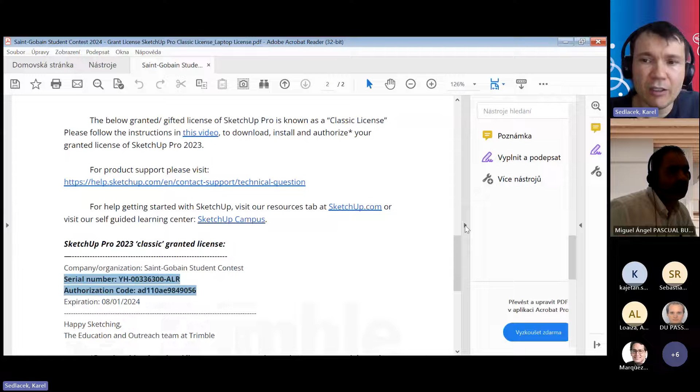Here is the guideline, but the best way is to see the video how to do it. I will share the video with you because I already used it before for myself, since I had a similar position like you have, so I installed it the first time.

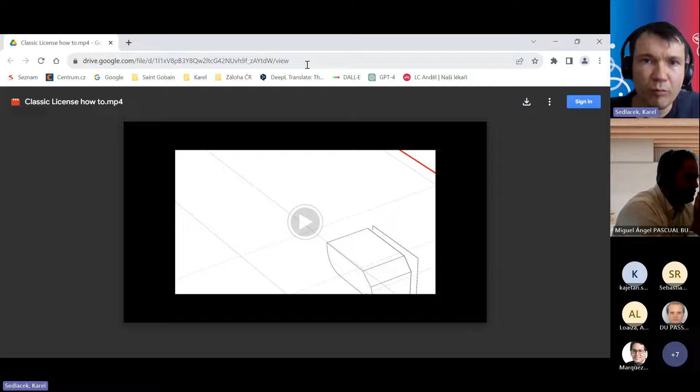So here is the video. I will also copy and paste the link to the chat so you can click on it and run the video afterward. Let's start with the video, and I will comment on it since you can't hear it.

Here is the video about the SketchUp license and how to use it. First, in Google you can type this link where you can download the SketchUp license. Use whatever browser you like, and sign in to Trimble ID. You need to create an email first, and if you already have one, just put it there, then the password.

I recommend first creating an account on SketchUp, and after that you can download the license. The code put there is for validating that your email is correct. So you put your email, the code gets sent to it, you validate it, and then you can download and install.

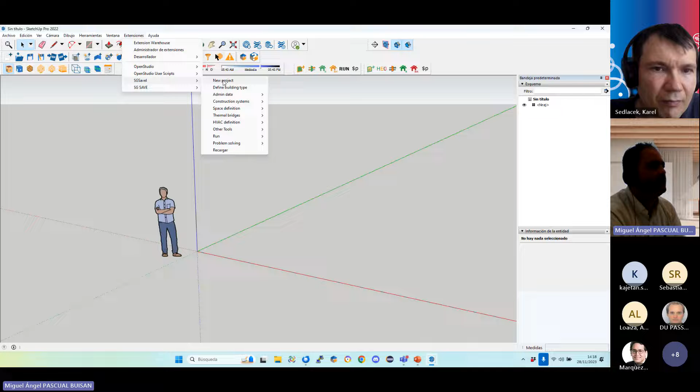Now a very important thing when starting a new project is that we should run this command. We should always start with new project. This is important because this command is preparing the folder structure that is going to hold our project. So, for example, I'm going to call the project 'day one'.

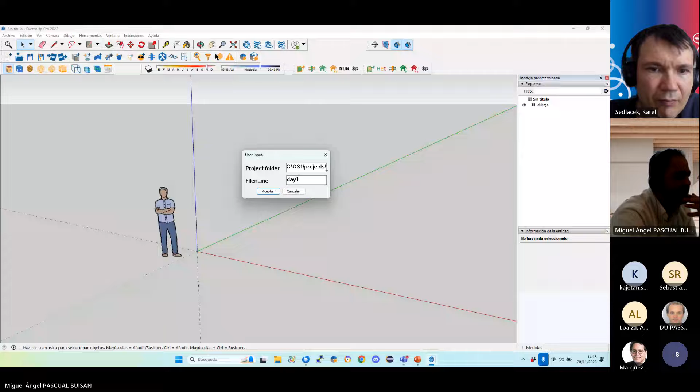And okay, we have a new project created.

Now we have to select the weather data for our simulation. Let's suppose we choose, for example, a climate weather for Paris. Please choose Helsinki because the students will do it in Helsinki. But you can also find other climatic data on the Energy Plus website. So if you write Energy Plus, you can also find the different climatic data.

But don't worry, for the student contest we will always cover this with the database of the cities where the student contest takes place. If you want to run a simulation anywhere else, you can ask us and we will teach you how to download another weather data and how to install it so you can use it with the tool.

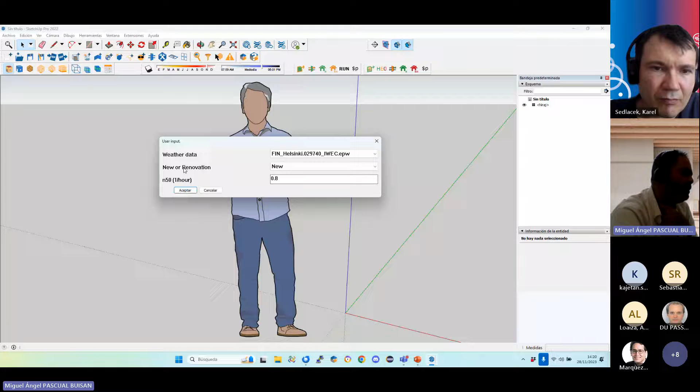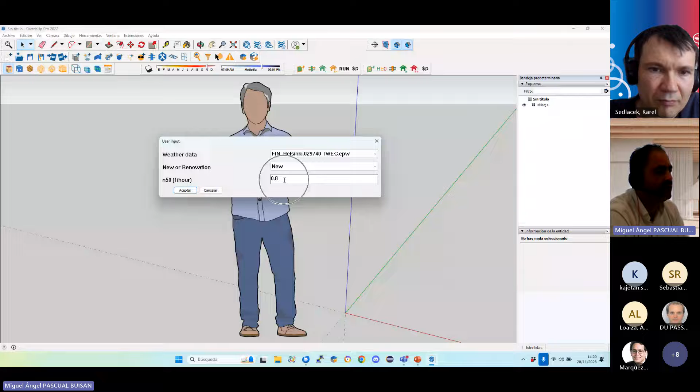Okay, we have here to choose: are we working on a new project or is it a renovation project? Because I guess the standards are a bit different. And the other parameter we have to decide is related to the air tightness of the building. If you don't know what to introduce, I would recommend you just leave the default initial value. Okay, we click accept, and then we can start modeling our building.

I will just mention then for the standard passive house, it should be 0.6 — there is a predefined 0.8, but if you would like to be according to the student contest, you should put there 0.6. But yeah, it's just basic information, thank you.

So introduce 0.6. Now we are starting with a very simple geometry. It's almost a cube that is 8 meters by 6 meters and 2.7 height. It has a couple of windows that are facing south. So this is just to start modeling.

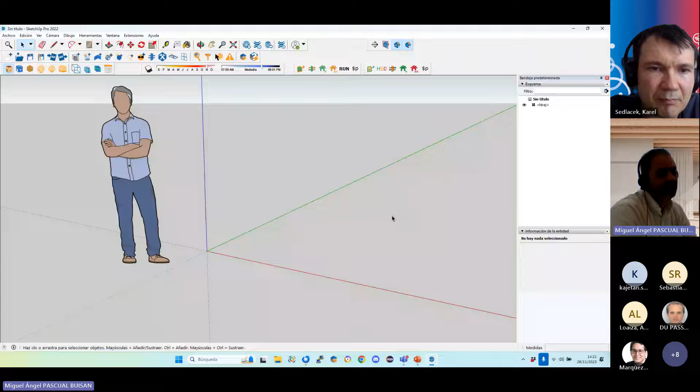When we start, we try to start with something very, very simple. Anyway, modeling with SketchUp is something that is fun. You start with simple things and then you can go into much more complex geometries with many spaces and so on.

So before starting drawing geometry, we have to create what we call in energy simulation a space. A space is the minimum mathematical entity in which we are going to have the energy balances — what are the gains, what are the losses. They are computed for each space we have in our geometry.

So we are going to create one space. For that, we will choose this button here. We click here, and I'm going to insert this new space. This is something like a fictitious entity — we can insert it wherever we want. So for my convenience, I'm going to introduce it at the axis origin. I introduce it — okay, this is a space.

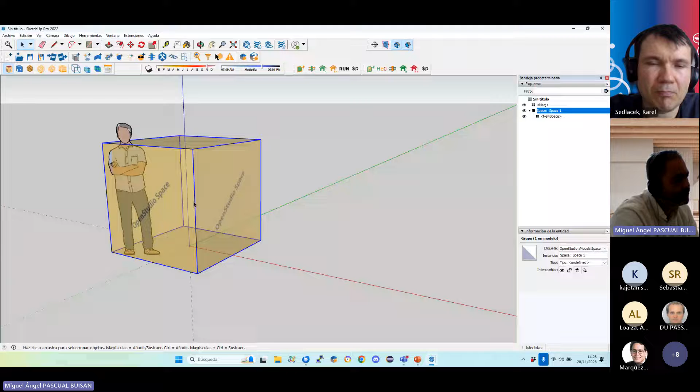Okay, this is a selected space. I notice it because the corners and edges are blue. That means it's selected, but I need it to be open in order to host the geometry I'm going to draw. So I'm going to double click on it, and now it's an open space. An open space is represented with a cube drawn with a dotted line.

So now I have to start drawing my geometry when the space is open. In most cases, what I'm going to do is take this tool, the rectangle. Maybe when you run SketchUp for the first time, instead of this icon, you could have this one or this one or this one. If that's the case, just click here and choose rectangle. So when we are going to draw a rectangle, you see the cursor has a pencil shape and the shape of the rectangle.

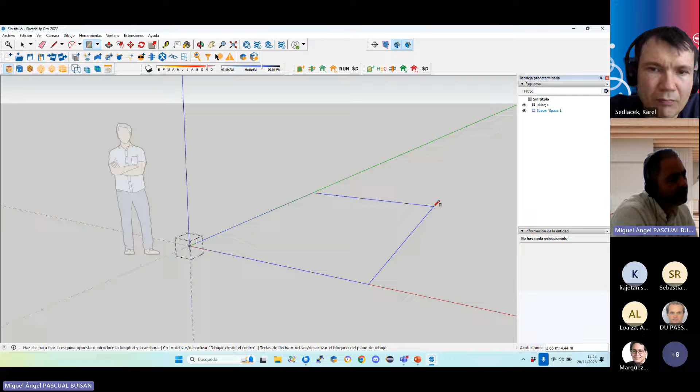In order to draw the rectangle that's going to represent the floor, I have to click two corners. The first one, I'm going to choose the origin of the axis. So I click here with the left button of my mouse. Now I move the cursor to another area of the screen, but instead of clicking, because if we click in any point, I won't know the dimensions of that square. It's as simple as writing 8 semicolon 6. If you notice in the bottom right corner, it's written 8 semicolon 6, and then I click enter. Now we have this floor whose measures are 8 by 6.

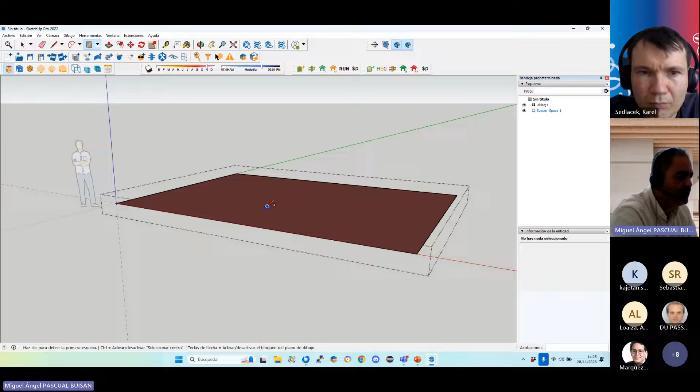You can zoom up and zoom down using the scroll wheel of your mouse. And if you click the wheel of your mouse, you can change the view that you are seeing.

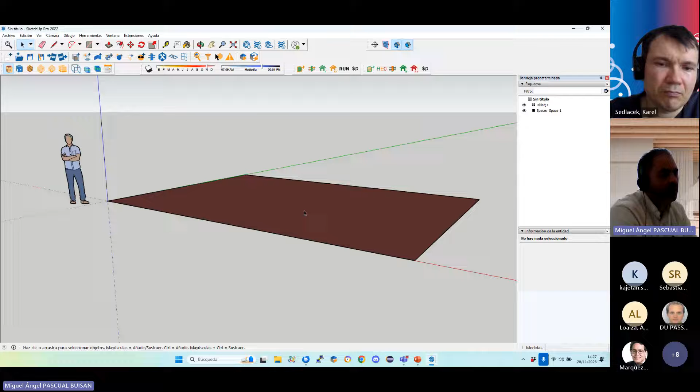It's important that you don't click outside of the screen now, because that will close the space that is open. In case you do, for example, I'm going to press the escape key, and the space bar - I click the space bar, I have switched to selection mode, and now if I click somewhere in the screen, you can see that I have closed the space. We cannot see anymore the surrounding box with dotted lines that we were seeing a few moments ago. So what can I do? If I want to continue inserting geometry to that space, I have to reopen it. How am I going to reopen it? With a double click. So I double click, and here it comes back, the space. I notice it because of the surrounding dotted line box that I can see now.

So usually we will start drawing the rectangles of the floor. Now how can I generate the rest of the geometry? In most cases, we are going to use this tool - in English, it's push and pull. And we are going to use it pushing. For example, I click here.

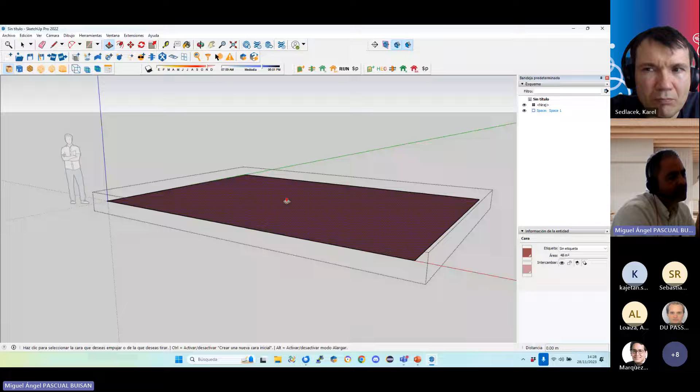You see, when I left the cursor near the floor rectangle, it becomes shaded with dots. That means that if I click now, I'm going to pick that surface, and it's going to be the surface that generates the push. So I click now, and I move the cursor upward. As you can see, while we are pushing up, new geometry, new rectangles, new faces appear. Now it's more or less the same as before - if I click anywhere on the screen, I won't know the dimensions of that geometry, I won't know the height.

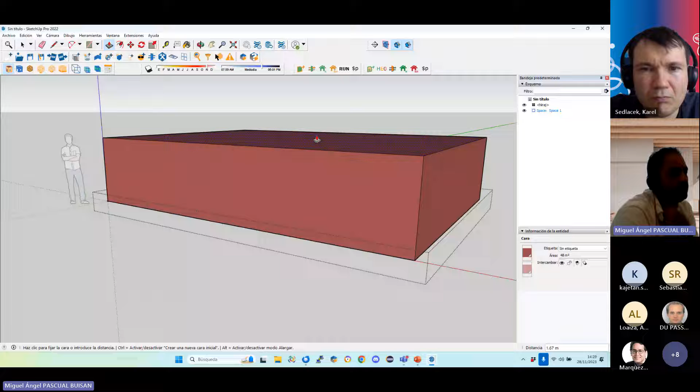So if I want it to be a certain dimension, I have to enter it again as before. For example, in this case, 2.7, and then I click enter. So now we still have the space open - we can see it from the surrounding box. I can press the space bar to switch from the push and pull tool to the selection tool, and then when I click outside the space, the space closes.

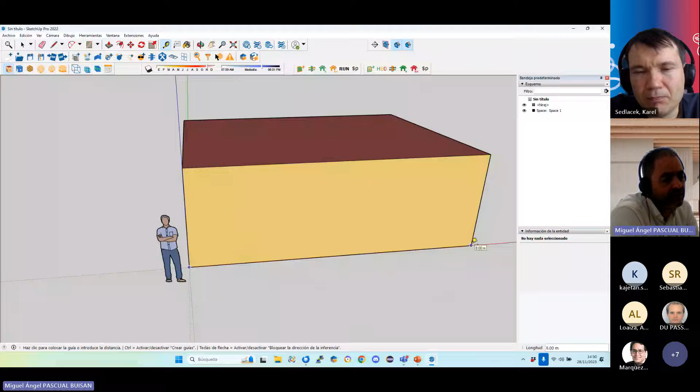So here is our cell, here is our space. I can check its dimensions. In order to check the dimensions, I'm going to take the tape tool. I take it, and for checking the measures, I click in the origin of the measure, and then I move to the other corners. I don't click in the second corner, I just stop the mouse there, and the attractor takes the closest important point in the area. So we can see here in the tip that that's 8 meters, we can see there that it's 6 meters, and we can see that the height is 2.7 meters.

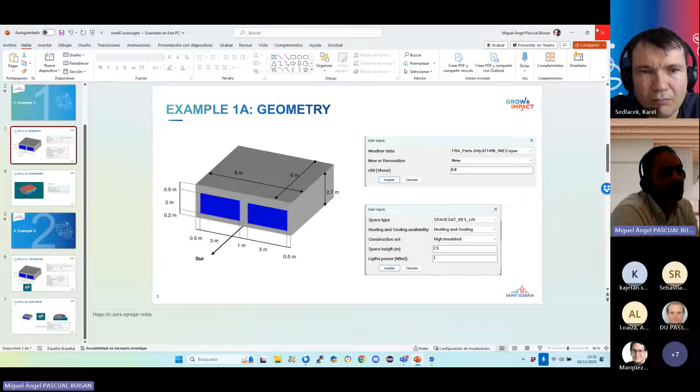So the geometry is okay, it's what we want. Now we need to insert some windows. As you remember, in our example we have two windows that are 3 by 2 meters, and they are at a certain position. So how do I draw the windows? It's as simple as drawing a rectangle on that wall.

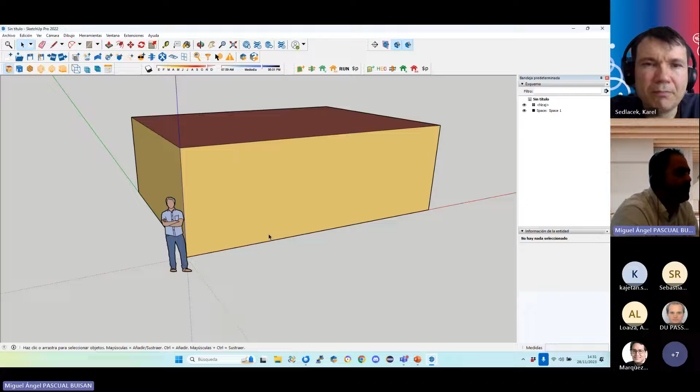If that window is going to be part of this space, I have to open the space first. This is very important, something we often forget about at the beginning. So, I am in select mode, and I have to double click on the already existing geometry of that space.

Now that it's open, I can take the rectangle shape again and draw, for example, a couple of windows, or as many windows as we want. But those are not the windows in our example. These are windows that I have generated randomly, so what I'm going to do is delete those windows.

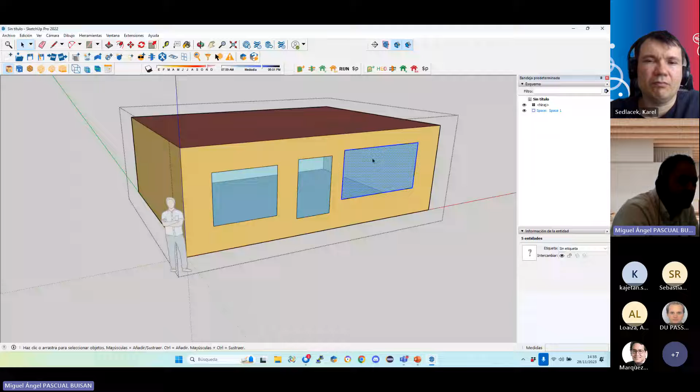How do I do it? The first thing to do is to change to select mode, either by clicking here or by pressing the spacebar. I'm going to double click, 1, 2, 3. Really, I've lost count, but I stop clicking when I notice I have selected the rectangle, the perimeter, and the border. Now I just click the delete key on my keyboard.

This is the same: I finish with a double click, selecting everything around - the face, the rectangle, and the border. It's also possible to delete one window just by deleting one of the edges, because when you delete an edge, the window is no longer closed and disappears. I can draw another line and the window will reappear.

In most cases, this is just an approach. Sometimes the real dimensions of the window aren't very important, though this isn't absolutely true, because solar heat gains through a window and shadowing or self-shadowing depend on its geometry. But for a first approach, in many cases you don't need the exact dimensions. You can make an approach with probably the same surface area, but instead of 3 windows, you have just 1 window with the total area of those 3 windows in that facade.

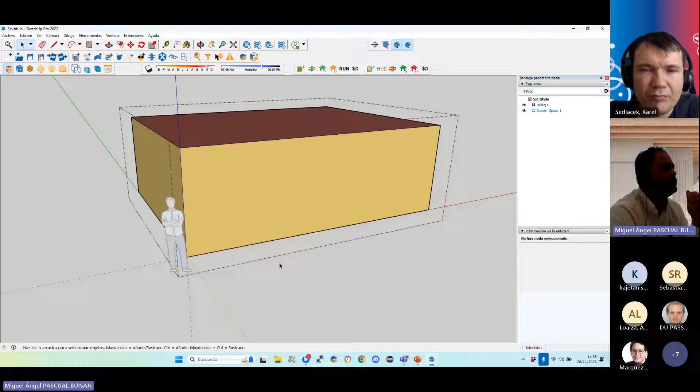Anyway, I'm going to try to explain how to locate these windows with some precision. To do that, we have to use the guidelines. If you have previous experience with SketchUp, you know these auxiliary lines are very useful if you want to draw with certain precision.

It's funny, but in SketchUp, in order to draw these auxiliary lines that help us introduce geometry with the right dimensions, we are going to use the same tool that we use to measure - the tape tool. How does it work? The first thing to do is click on an already existing edge, for example this one.

After clicking the base edge, if the auxiliary line doesn't appear, you have to click the control key. Now it's appearing, and it works more or less as always. I can click in the screen, but then I won't know the exact distance of that auxiliary line from the base edge. Or I can type 0.2 and press enter, giving an auxiliary line with an offset of 20 centimeters from the base edge. It's more or less the same from here.

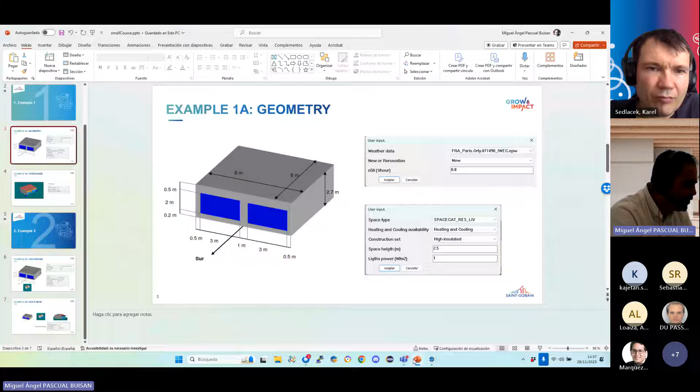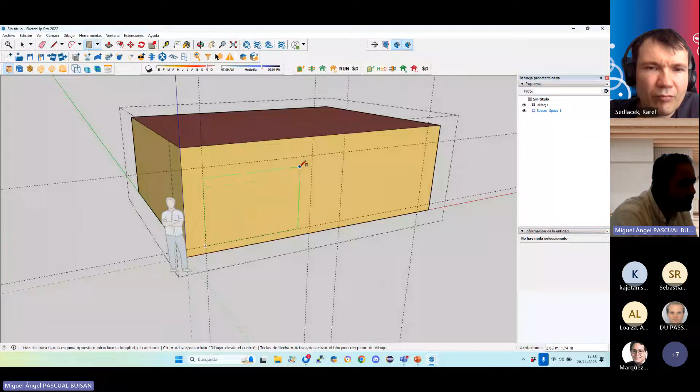You see, it's not appearing. If my memory serves me well, it's 5 meters - no, half a meter. We can write 0.5 to the right, and 0.5 from here, and for example 3 meters from here, 3 meters from here, and I think 2 meters from here or something like that. So I have drawn some auxiliary lines that can help me now draw the windows, just clicking from intersection to intersection.

Usually, once you have finished drawing your geometry, your model, the auxiliary lines, it's good to delete them. So here we have a tool. Sorry, because I have SketchUp in Spanish.

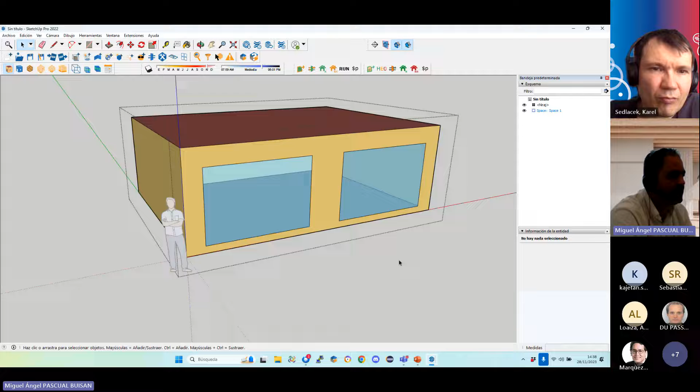But the tool we have to use to delete these auxiliary lines in English is called delete guides. Okay, I have the geometry. So what's next? In order to run a simulation, we have to define a few more things. We have to define what kind of a space is this space.

Because what kind of a space is important. Is it a residential space? Is it an office space? Is it a healthcare space? Because associated with the different space types, there are different loads.

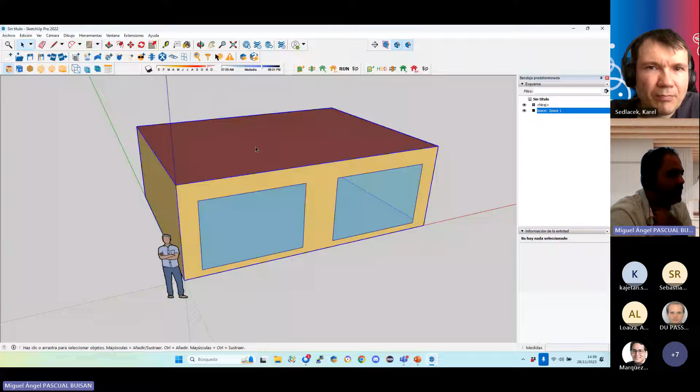Different heating and cooling loads, etc. So how can we do that? What we have to do in order to define the heating loads we have in the space is first select that space. In order to select the space, we have a couple of options. We can click on it. Be careful because it's just a simple click.

You see, we have this space. Now the edges and the corners are highlighted in a blue line. That means that the space is selected. It's important that you distinguish this from opening the space - this is selecting the space, not opening it. With just one click. We have another option, when you are in select mode, you can open a window that includes the space, with the same result - the space is selected.

So now, where is the tool to define the space? To define the space type we have here a couple of options. You can click with the right button of the mouse. You can come here to this menu, SGSavei, with an I at the end, and you can select - you have a couple of options.

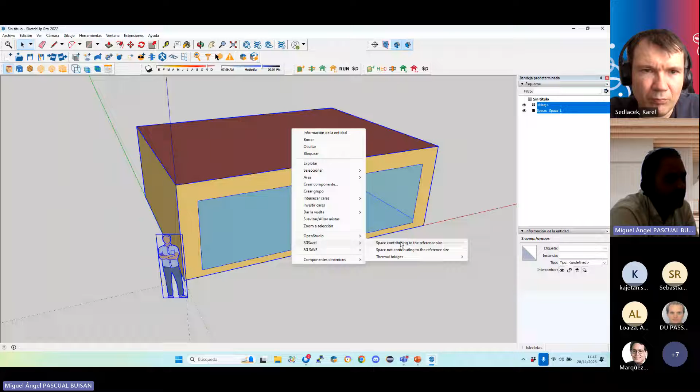Space contributing to the reference size - this applies, this is terminology of the ISO 52000 standard. There are two types of spaces: some spaces that are contributing to the reference size of the building - these are spaces that have a heating or cooling HVAC system - and spaces that don't contribute to the reference size, like garage or storage spaces, and so on.

So let's suppose this is a space that is contributing to the reference size, so I would choose the first option. And we just have to select a few things. What kind of a space is it? This is residential living, we are going to leave it like that. This is also the same categories that we have in the ISO 52000 standard.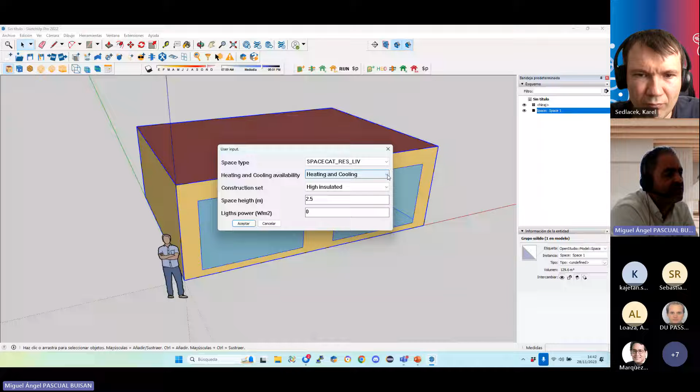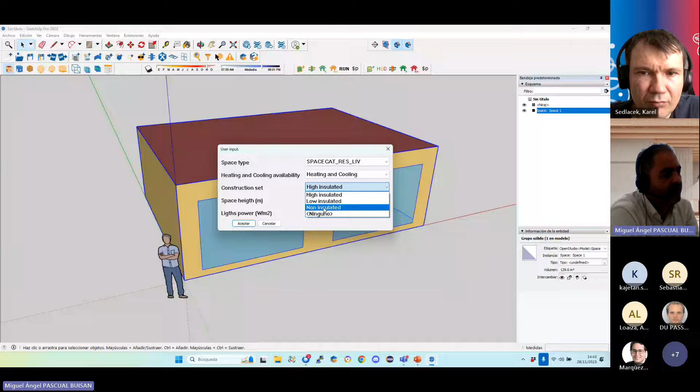The next thing we are going to choose is what kind of HVAC system do we have here. We have a heating and a cooling equipment, so we have to choose this option because this will introduce a heating and cooling thermostat. And then we have to select something about the thermal insulation of the envelope - this is something we will come to later. For the purpose of explaining, we are going to start by choosing that the construction, the envelope of this space, is not insulated.

Okay, the next question is about the height - this is the free height of the space. From here to here it was 2.7, but we have a false ceiling, and the real free height that we have in the space is just 2.5 meters. And let's suppose we have a very low lighting power here, about 0 watts per square meter. I'm going to click to Miguel, I will accept.

Just mention for the students that everything you can modify also afterward, so it's possible to change it also. If you would put something and you don't know at the beginning, put something there and after you can modify it later. So everything is possible. This is just a little note.

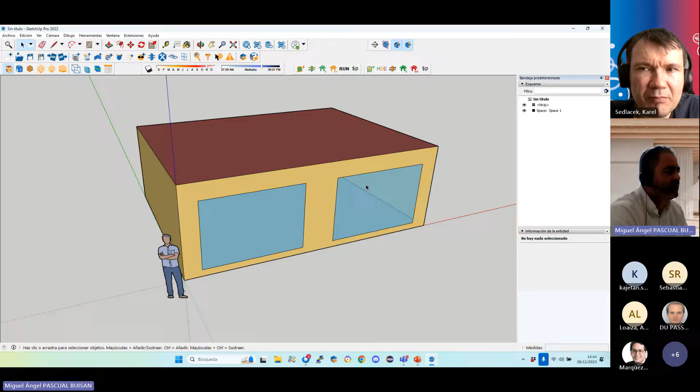Thank you, Miguel. Okay, so now I'm trying to keep things very, very simple. Maybe next day I will go into a bit more complex things. But what do we have to do now? Let's get started - we are going to click the run button here.

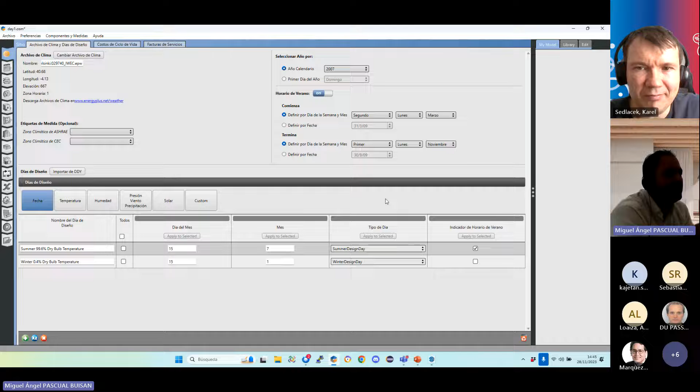Okay, one of the things is that SG SAVE International is a plugin running on a generic purpose software called OpenStudio. Our purpose is to try to make things as simple as possible. This is a very complex tool - you can configure many things here, very complex advanced systems. But as a starting point to the simulation world, we try to make things very simple. So in most cases, the only thing you will have to do is come to this label, this button, and run here in order to start the simulation.

Okay, this is a very simple model. So this is something that sometimes happens - the first time you run a simulation on a model. Okay, I rerun the simulation, and okay, this is complete. I will just mention the simulation.

Also one more thing - since Miguel is using a combination or mix of Spanish and English, but you will have everything in English. Don't worry.

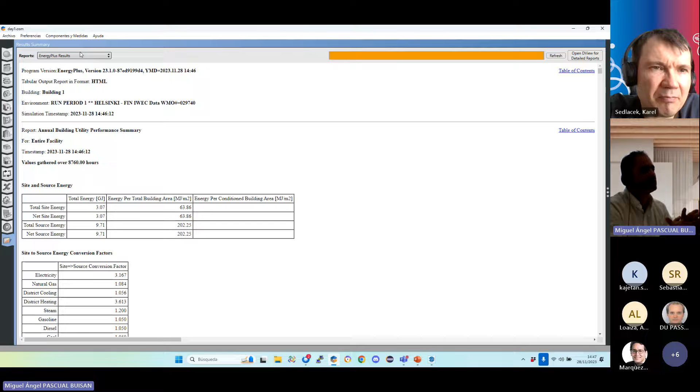Okay, so once you have finished the simulation, you can go here to the results summary. You can go to the next button here, and here you can find two reports. This is the Energy Plus results - an historic report from Energy Plus that we have been using for 20 years.

So it's a really complete report that you can use in order to analyze many things. It's usually important to check the partial results you have in that simulation to know if the surface area of the building, the volume of the building, the heating loads are correct - everything.

So it's really important to have a look at this report. Miguel, there is a question in the chat.

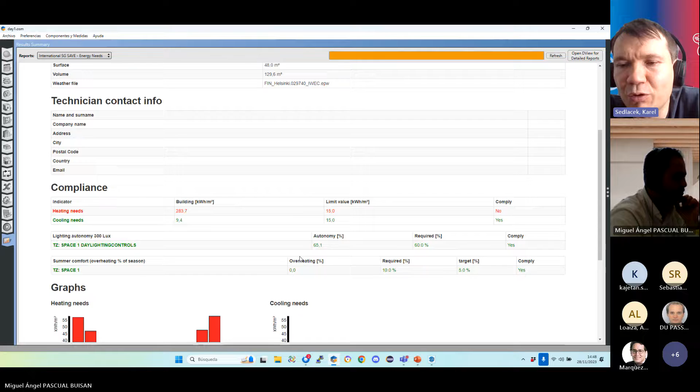Open Studio should be installed on the computer - will it be installed with Saint-Gobain SAVE International? Yes, it will be automatic install with Saint-Gobain SAVE International. So don't worry - after you install SketchUp first, and then Saint-Gobain SAVE, it will automatically also install Open Studio because it's part of Saint-Gobain SAVE International.

So don't worry. And also in this system, what Miguel is showing you, there's lots of things predefined for the standard building. So if you would like to change something, you can also do it after the first calculation, before you finish here. So the first calculation is somehow a black screen.

What you have seen, one black window - this is just how the calculation transferred the data to Open Studio. And after that, in Open Studio, you can change, I don't know, the occupancy of the people, some other details, HVAC system, and many other things if you would like.

But we made it as easy as possible for you. So lots of things are predefined according to the building and the basic standards. So if you used offices at the beginning or a residential building, lots of things we already predefined for you to make it easier. But if you would like to change it, you can do it here quite easily, or also in SketchUp if you would like. So it's up to you.

But if you don't really have a reason to change it, you can just check it, and if you agree, you can just continue. There is another question.

Will there be any conflict in case Open Studio was already installed on the computer before? I have it already installed. Okay, so it depends on what kind of version you have, but it can happen that you already have the latest version, and in Saint-Gobain SAVE it is still the older one. I don't know if there can be a conflict.

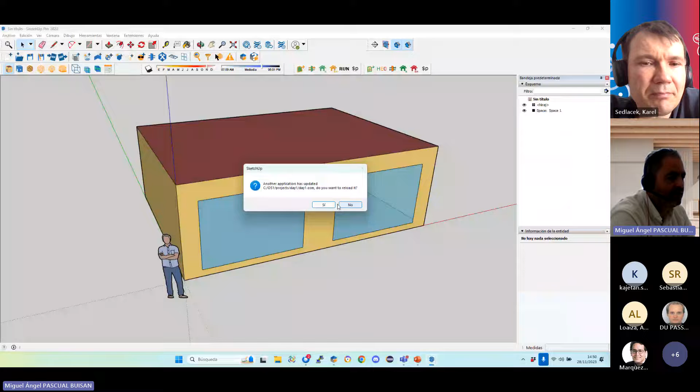Maybe Miguel has better knowledge. Yeah, really, when you install SG SAVE International, you are also installing OpenStudio. Okay, it's important that - there is a little thing you have to take into account if you have a previous install and if you are using the SketchUp plugin.

The only thing you have to take into account is that you have to go into preferences and you have to configure it to use the OpenStudio application - I think version 1.5 or version 1.6, because it's clear.

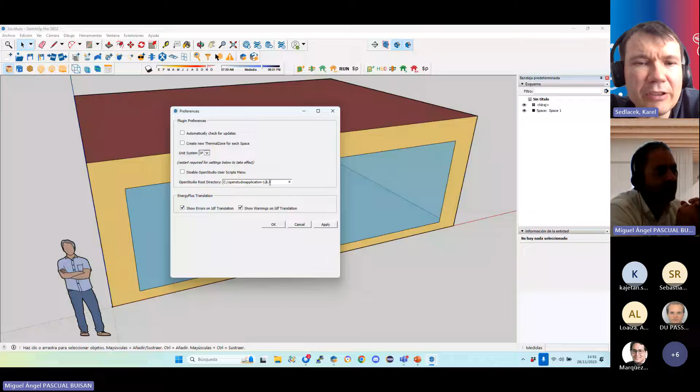Yeah, because I also experienced this in the past, in my case. So probably you will install both - you will have the current version of Open Studio and also the new one.

And what Miguel shows, you also need to go to the latest version in the menu of Saint-Gobain SAVE. Yeah, you already found it. Perfect. Thank you, Miguel. I have installed many versions, but in order to run SG SAVE International, you have to use the last OpenStudio application that is available now.

So we were checking the results - where are they? Where are they? I don't know what happened. Ah, here it is. Okay, and we have this other report.

Okay, here we are studying a few things - we are studying what are the heating needs, the cooling needs. This should be, both of them should be lower than 15 kilowatt-hours per square meter.

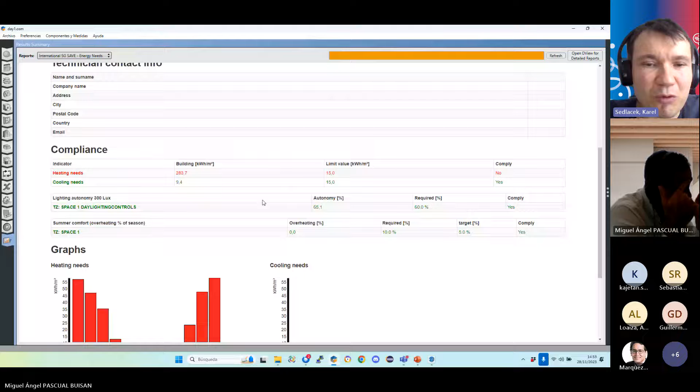As we have chosen a non-insulated building, it's clear that we are not complying with that. I'll explain for the students, because maybe it was not so obvious. At the beginning we chose a kit or set of construction without isolation to make it faster. So you probably didn't miss the option to choose the construction, because we already chose the predefined set. We have these results because we didn't choose any construction, we just used what was predefined here, like no isolation.

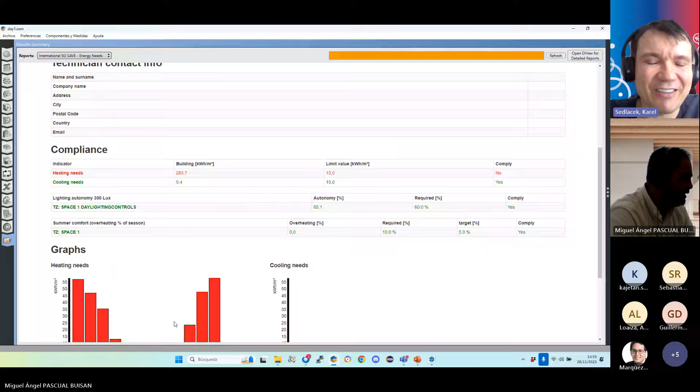This explains why you can see this kind of huge numbers according to heating needs. I'm going to explain. So, okay, we have a few graphs and a few tables.

It's also important that you can investigate, it can help you to understand your building. You have here a button to open what's called the detailed reports. When you click here, you can have access, for example, to... okay, this is confusing me.

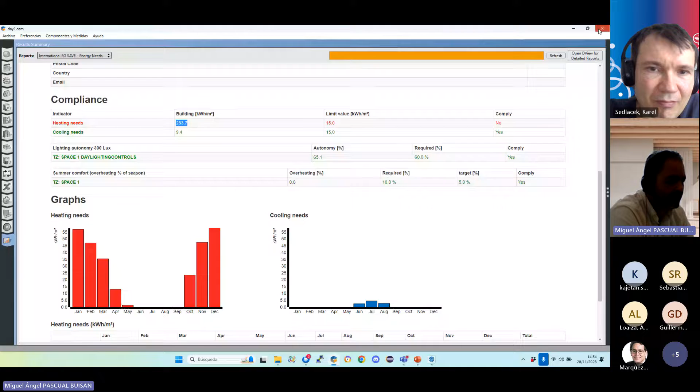Okay, yes, because we haven't installed an HVAC system for this graph. We will come back to this later. So, we are not complying, we have chosen a non-insulated envelope. How can I fix it? How can I change my model in order to improve this? Anyway, I have to say that for this cell it's going to be difficult to comply, because it has very little surface area and a lot of envelope for losses. So it's going to be a bit tricky.

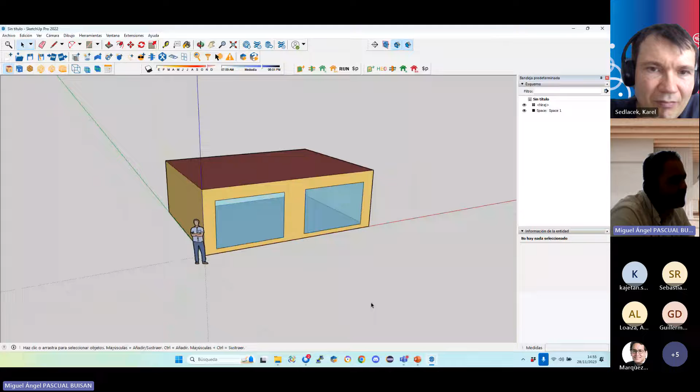When we define this space, we have chosen a construction set that is non-insulated. As Karel has mentioned, there are also other predefined options for the envelope, one of course is high insulated. I'll just add that students can also create the set they would like. So these are three options, just for a quick explanation, but if you would like to do your own set - and in most situations you should - you will create your set and after you will adapt it for the whole building.

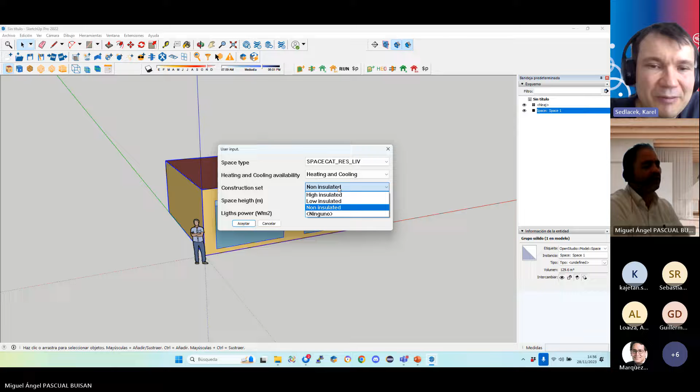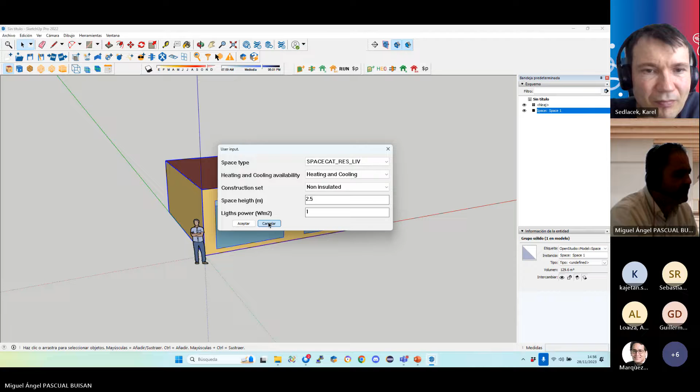These predefined preliminary options are all in order to run a simulation for a first case study, etc. So how can we define a new construction set? We have to go here to extensions, we have SG SAVE International, and we have to go to construction systems. Here we can define new material, new glasses, new construction system - the different layers that make up a wall.

You can define something with an internal heat source - this is for a radiant system, a radiant floor, and so on. But we can define a new construction set. We go here to define construction set, and for example, we find here what we have seen in the space definition. You remember we chose uninsulated, and there were two more options: low insulated and high insulated.

How does it work? This works if we choose uninsulated. Here we have everything - exterior surface construction, everything in contact with the outdoors, with the exterior environment, with the exterior air. We have walls, floors, and roofs. So for everything in contact with the exterior that is a wall, the construction system we have introduced is this one: non-insulated wall with double brick with a cavity in the middle. For the floors it will be this one, and for the roofs it will be this one.

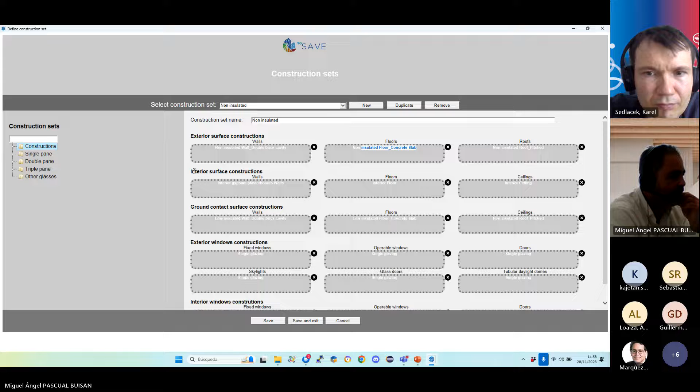These are the constructions that will be used for interior surfaces - interior surface is the surface in contact with another space. Here it will be more or less the same: walls, floors, and ceilings that are in contact with the ground. And for exterior windows, we have big single glazing windows.

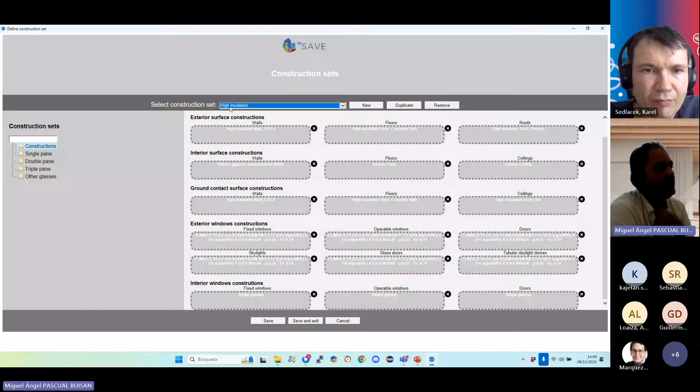So, for example, if I want to improve this, I should have checked high insulated. If I choose high insulated, I will have here a high insulated wall with ETICS technology - that means the typical exterior insulation system for a wall. A high insulation floor, a high insulated roof, and for the windows we have triple windows with thermal transmittance of 0.6 watts per square meter per Kelvin, with a solar heat gain factor of 0.55 and a visible transmittance of 0.74.

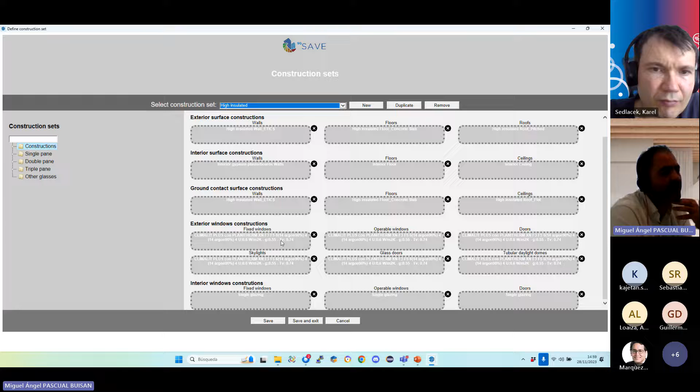How can we change this? Our recommendation is usually to start with one of these predefined construction sets. For example, I'm going to duplicate this high insulated construction set. Now it's copy - instead of copy, I'm going to say my construction set.

My construction set, okay, maybe I'm happy with these windows, or I can choose from this tree. From this tree I can choose other glasses or other ceilings that are predefined. For example, maybe I'm not happy with this high insulated wall, and I'm going to choose this wall plus ventilated facade number 3. I just click, drag and drop in the box, and I will have changed this wall.

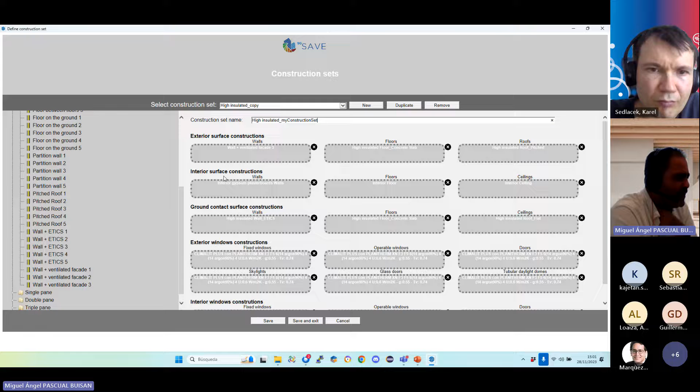Okay, but how can I define a construction so that it appears here, and so I can use it to define a wall for my construction set? I'm going to save and exit here, and instead of going to the construction set, I'm going to define construction system.

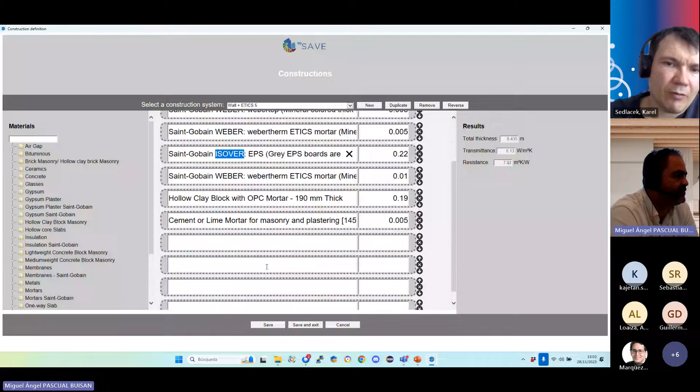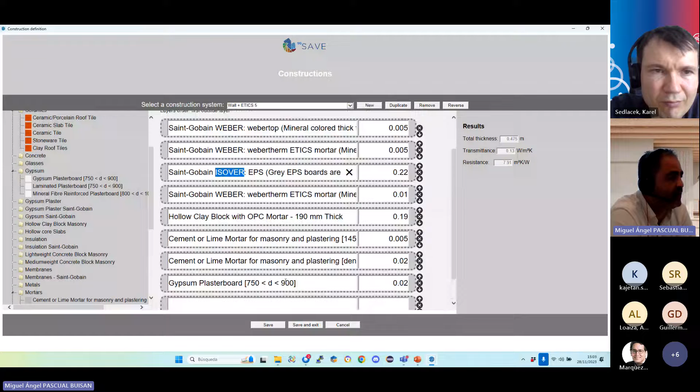But how can I add a new layer? It's as simple as this. I don't want to modify it, so if I want to add, for example, a mortar layer in the bottom - really, sorry if this is not correct from a construction perspective - if I need to add a new layer, I just have to find the material for that new layer, and just like before, click, drag and drop it into the empty box. That's all it takes to modify an existing construction set.

You can modify the thickness of that layer. As you notice, while I modify the thickness, the resistance and total thickness of the wall will change. You can move a layer upward or downward, and you can delete a layer by clicking there.

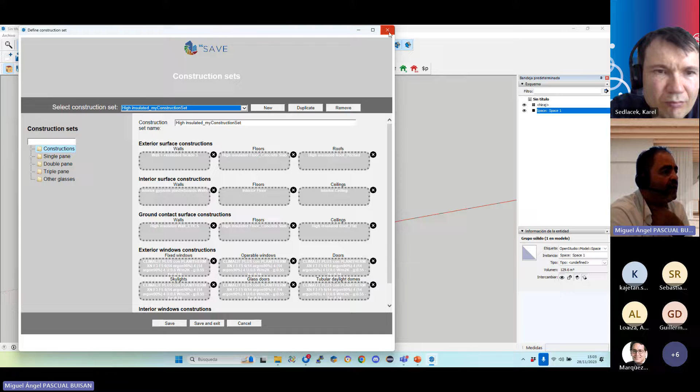So, as you remember, I'm going to go back to construction sets. The thin construction set - this is high insulated my construction set. This is the construction that I copied before, and I have changed this wall. So how do I assign this new construction set to this space?

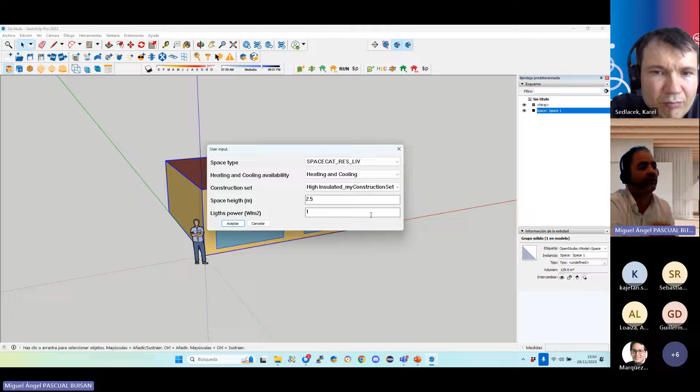It's just to run again the definition command. We click here to space contributing to the reference size, and instead of choosing the construction set 'not insulated', we are going to choose our new construction set. I'm going to click in Aceptar, and now we have to run again.

I will just mention again that the first calculation in the back window is quite fast, but sometimes you need to wait for it to finish, and after that you can launch the second calculation. The first one is just for transferring the data from SketchUp to OpenStudio, and the second one is the final calculation.

As you can see now, this is a very special case. It's really hard to comply. But now instead of having 200 kilowatt-hours per square meter of heating needs, we are close - we are at 25. But this is going to be tricky to comply with, because in energy efficiency there is a concept called compactness. Compactness is the relation between the volume you have in the enclosure and the envelope of that enclosure. So if you have a very small space, like in this example, it's really difficult to comply.

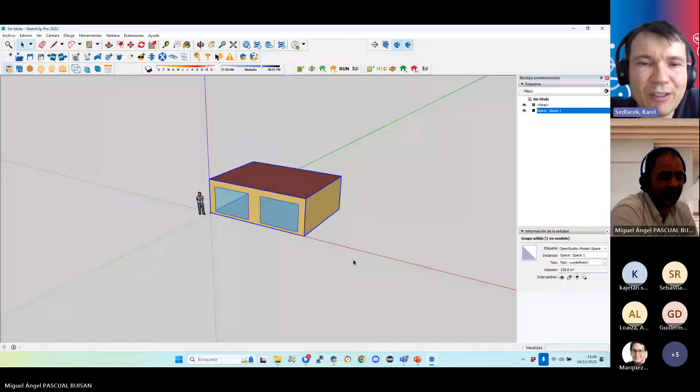But what you have seen is that we improved the thermal quality of the envelope, so we improve the thermal part, but we lose a little bit on the cooling needs side, because we have quite big windows on one side, and so on. So this is just a little note.

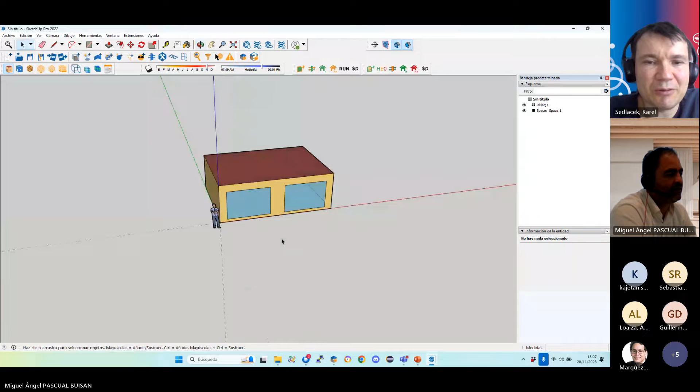Sometimes I'm going to modify this geometry, because usually modeling with SketchUp, as I mentioned before, maybe you don't believe it, but it's fun - it's like playing a video game. So I can open my space again. If I remember well, this was 6 meters, but now I can push it, for example, 4 more meters, and now it's a bit bigger. Now I can do more or less the same.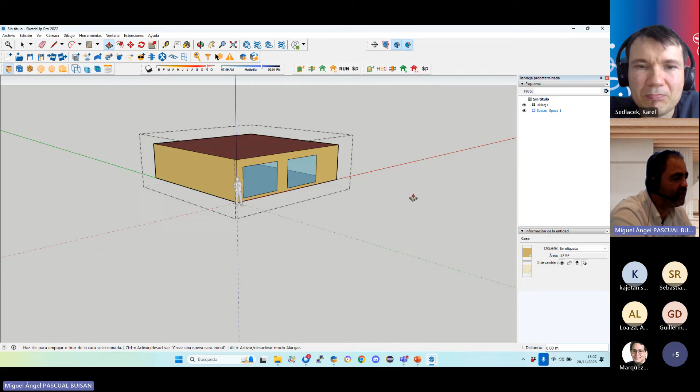Okay, it was 8 meters. Let's increase it by 2 meters. Now it's 100 square meters.

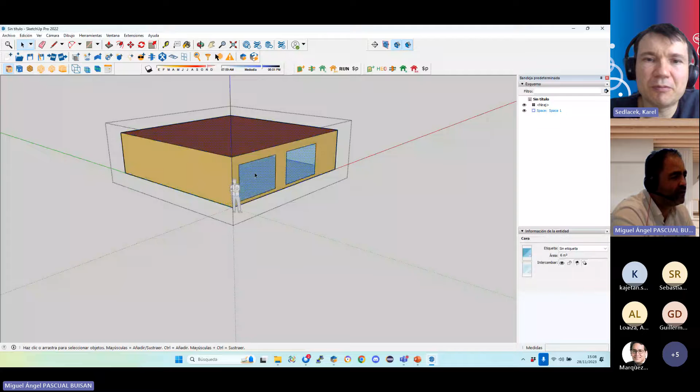We are having problems with overheating. Maybe Miguel, can you also show how to add one more floor?

If we want to add one more floor, we can create another space somewhere else on our screen and draw another floor. In this case, I'm not going to worry about the dimensions of the floor. I'm just going to click here, and now I am going to push. Let's suppose the height should be more or less the same as the first one.

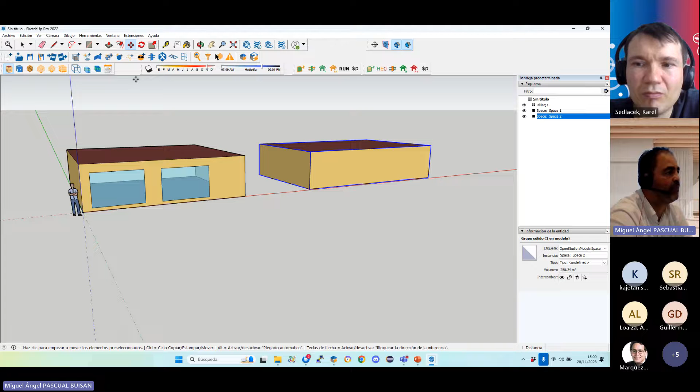So I create this new floor, and now I can move it with the key. There's a fast key that is M. I know the SketchUp fast keys because it's very useful. I click it and move it there. Now I can modify this by pushing this to here, from here to here.

And okay, let's open a couple of windows here.

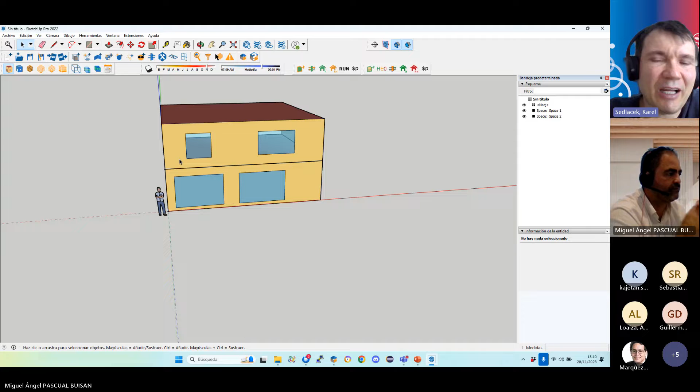Okay, I'm going to have some fun with the tiki tiki tiki tiki tiki. This is advanced, for now.

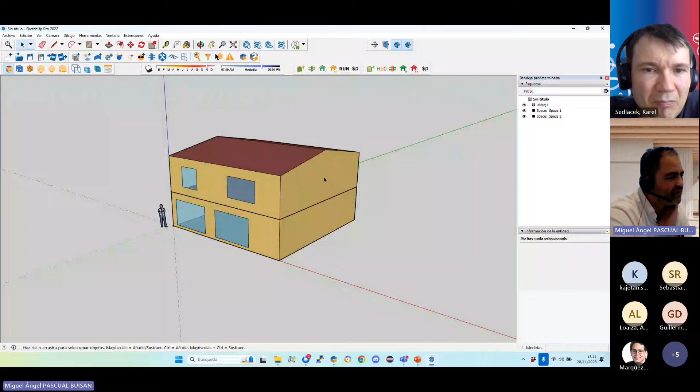But now I have two spaces. This rendering mode is what we call rendering by surface type. Gray means that's a floor. Yellow means those are walls, and dark red means it's a ceiling.

There is another rendering mode that is by outside conditions. Blue means it's in contact with the exterior environment, with the air, and brown means it's in contact with the ground. And what happens with the surfaces that are limiting these two spaces?

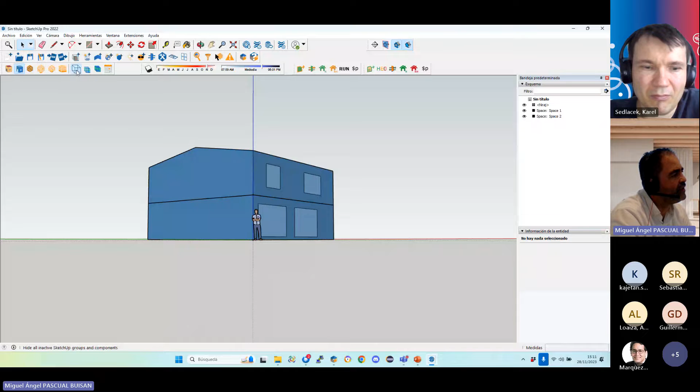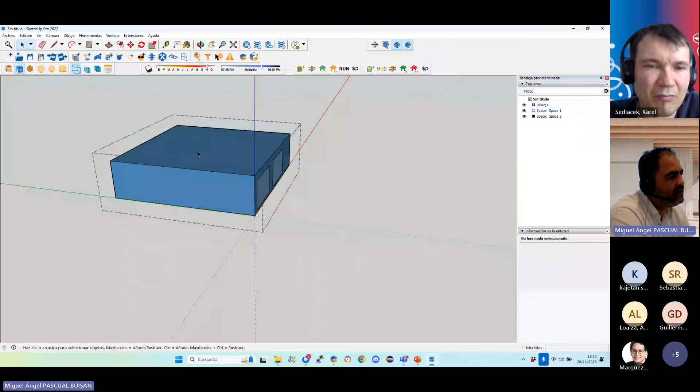I cannot see them. In order to see them, it's important to use this rendered mode. Now when I select and open one space, the rest of the model is hidden. Here we can see that this is a floor that by default is in contact with the ground, but that's not possible. And this is a ceiling of the first floor that is in contact with the exterior environment, with the outside air, which is also not possible.

So in order to fix this, when you have several spaces in your model, you have to select those spaces and click here on the surface matching tool. Now it's asking: do you want to intersect, do you want to divide these surfaces in order to do a proper matching? I always say yes. So now we have two matching surfaces.

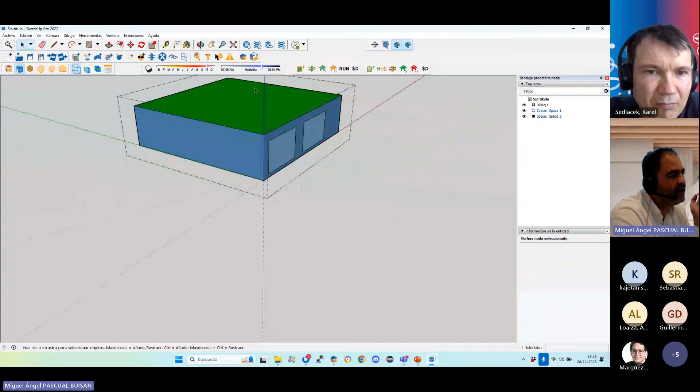This surface now is green, meaning it's an interior surface. And this floor is also green, an interior surface. This means that all the energy that goes through this wall will enter this wall, and the opposite: every loss that in a certain moment can go through this wall will end in this wall. This is the physical meaning.

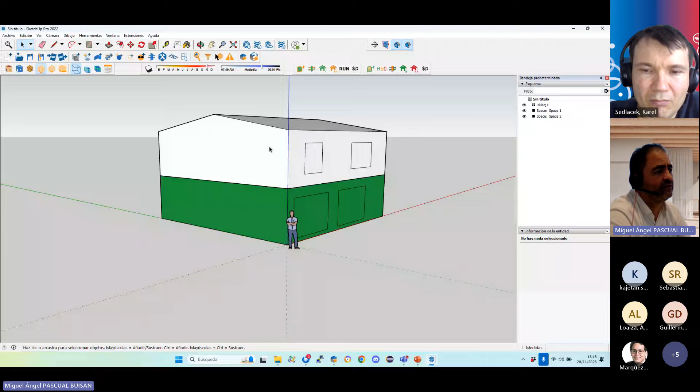I'm going to finish a little fast because we are running out of time. This rendered mode is the level of conditioned space. We have defined the first one at the ground level, but the new space we have created is not defined. We have to define it - this is a space that is part of the reference size or not. So I select it.

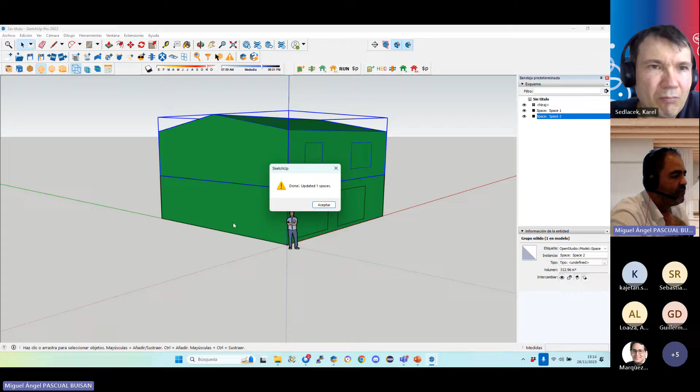I'm going to use the same high insulation construction set, defining it with more or less the same properties and values. Okay, now everything is green. In order to finish, I'm going to run the simulation.

I hope this will comply, because this new model is more compact. It has a much better relation between the volume enclosed and the walls surrounding that volume. That's something that, as architectural students, you should know. Compactness is a great ally in energy efficiency.

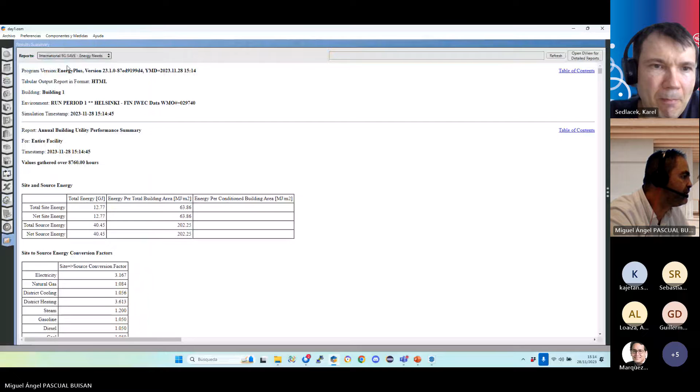We were almost there. Now we have a few options in order to comply. We are almost there, but we can leave it for the next day.

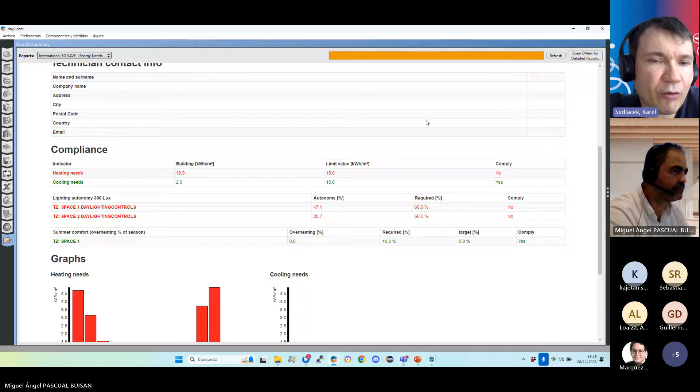Do you want to add something? No, I think we finished today with creating and explaining how to create a model. We also showed you how to create different kinds of construction sets and systems, and you can similarly create your own material and put it in the construction set or system. So I think we are done for today, and we can continue with the same example on Thursday.

On Thursday we will go to this example and show you what to do if you see this kind of result—how you can modify the windows to change the size, or add more, or add different kinds of thickness. It is quite easy.

You just replace it and modify the construction, and then you can do the calculation again to check the results. If you don't pass, you need to do it again. This is how you learn—sometimes 20 centimeters of insulation could be enough, but sometimes it's not, and you need to put 25 centimeters or even more, according to the requirement. For the student contest, the passive house level is the requirement.

So that's it. Thank you, Miguel, for this demonstration, and we can continue with this model and calculation or other modifications on Thursday.